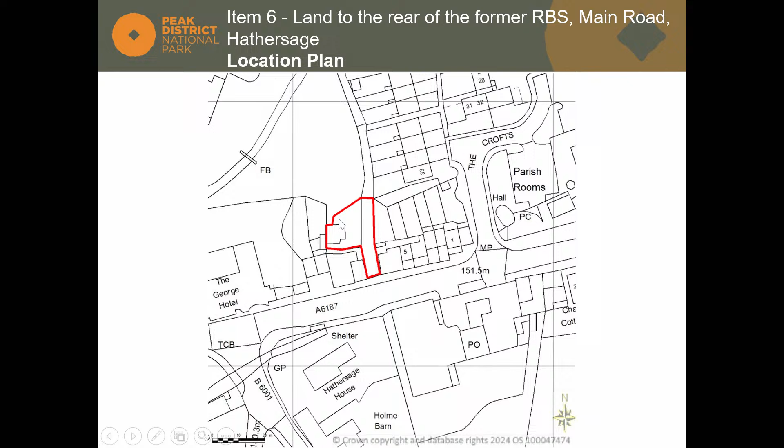So moving on, this is a closer view of the layout. Access from the main street coming from the bottom of the slide here. There's the existing building, which you begin to see is a tin corrugated roof building there. There's 5, or 6 sorry, counting those, parking spaces to the front. The existing building has been used for ad hoc storage and parking for many years. You can see there's a tree to the rear — a small, very poor condition, alder tree — and there are some sycamore trees just immediately north of the building.

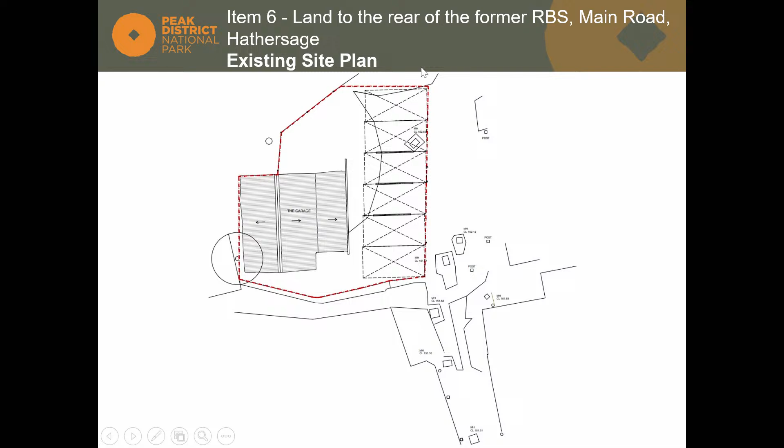So the proposed layout — the proposal is for the reuse or repurposing of the garage to provide, in the applicant's description, a flexible mixed-use business-stroke-dwelling. He stressed to us, and we heard on the site visit yesterday, that it's not for a replacement building.

He seeks to retain the internal frame of the building, and we had a good look at that on site, along with the boarding to that framing, and encapsulate that within new fabric. However, the fact remains, in the officer's view, that there is a considerable amount of alteration, and we'll see that in the plans, which involves one new extension to the south.

So that's a new extension on the slide here to the south of the building. And the existing extension, you can just see dotted to the front, or the projecting lean-to, is replaced in its entirety and extended southwards, whereas the existing main body of the building has its walls clad internally and externally to insulate the building. There's a new raised floor and a new roof with insulation on top of the existing framework. So the building on the plans raises up by about 300 millimetres, and it's reclad with a similar dark black corrugated sheeting along with new fenestration.

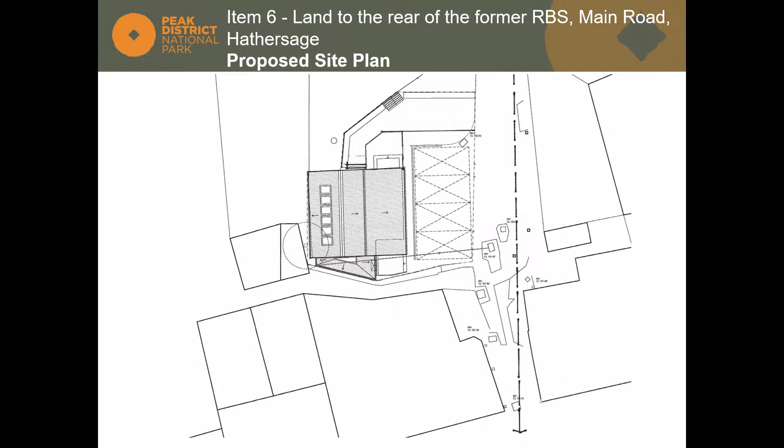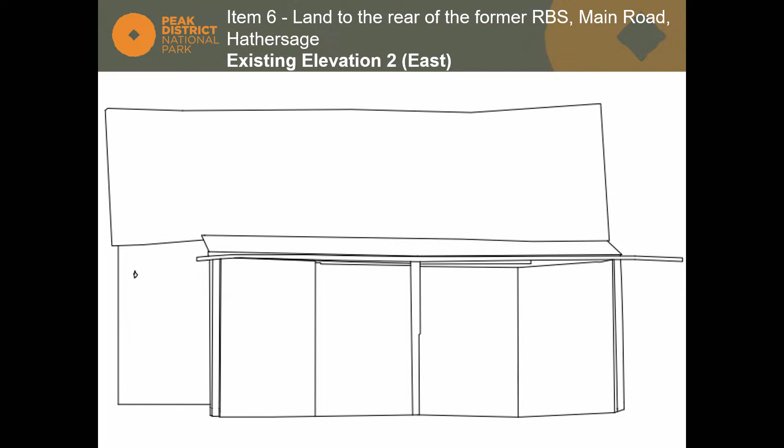So, just going through the detailed plans. That's the existing front elevation and as proposed. So you see, you just make out the dotted line of the existing building there. So you can see the roof is raised slightly. This is the new extension to the left, which has a hipped roof form. There is a timber enclosure for an air source heat pump here, and this is the replacement extension, which is widened to the full width of the building.

And these are glazed, full glazed fixed panels behind what would be timber louvers. And on the right hand side there's a small area you'll see in the plan with access to doors on both sides.

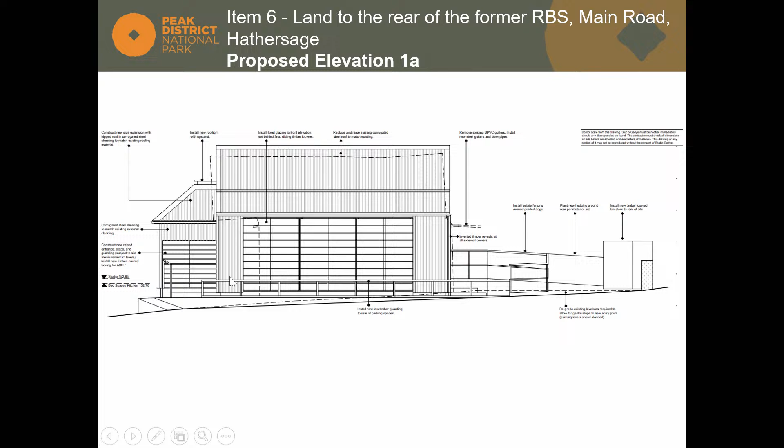It's just a closer view of the same. So that's the side elevation facing the footpath to the Cintra's tea room, and as proposed. So you see the hipped extension there, and the air source heat pump enclosure in the middle, and new glazed doors within this lean-to, which is raised up to provide more height. You can see again the outline of the existing building.

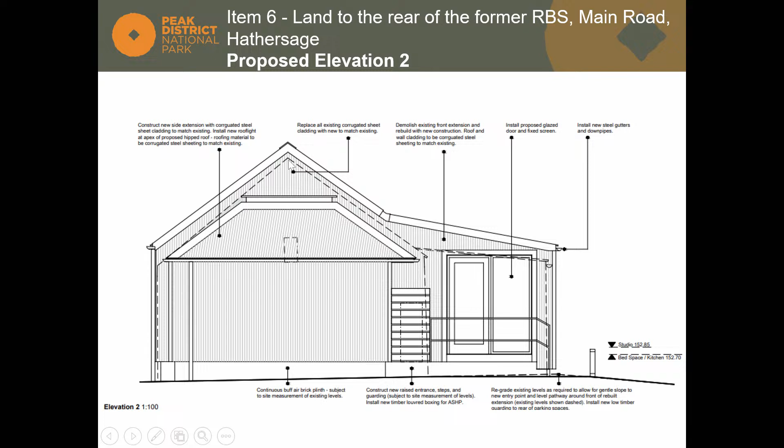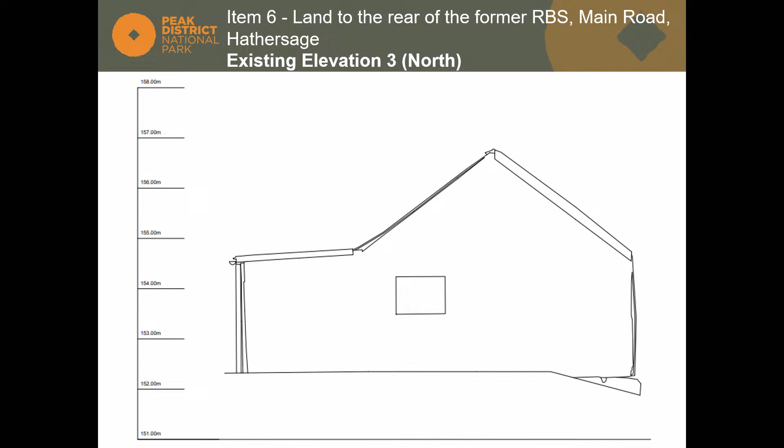And the rear view, and as proposed with roof lights lighting the building. And the other end, looking back towards the main street as existing, and as proposed with the new fenestration and lean-to.

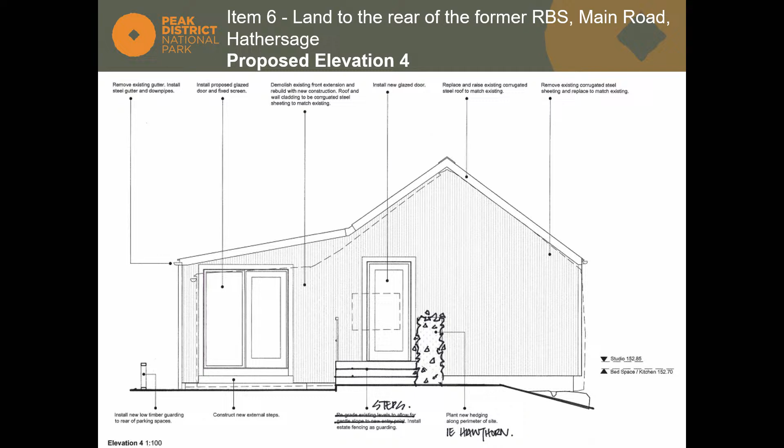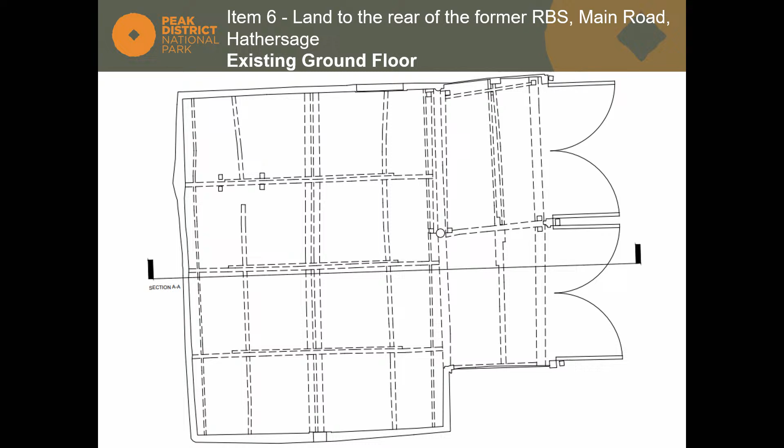So it can be seen in the photographs and these slides that from the officer's view, the building doesn't contribute anything to the character of the village. It's not a valued vernacular or a listed building, and as I said, we conclude it detracts from that. We also don't consider it to be a non-designated heritage asset, a view which is also supported by our conservation officers. There are also concerns about the large glazed panels we've seen to the front, which don't reflect the Peak District building tradition or the character of the existing building, and neither does the form of the hip-roofed extension.

In terms of internal layout, the proposal is to be absolutely clear. It's for essentially a market dwelling with shared space for business use. The layout, the frontal area here is a bed space and a kitchen with left of this line being a studio, and the hip roof extension housing a small bathroom and shower room, and the parking to the front.

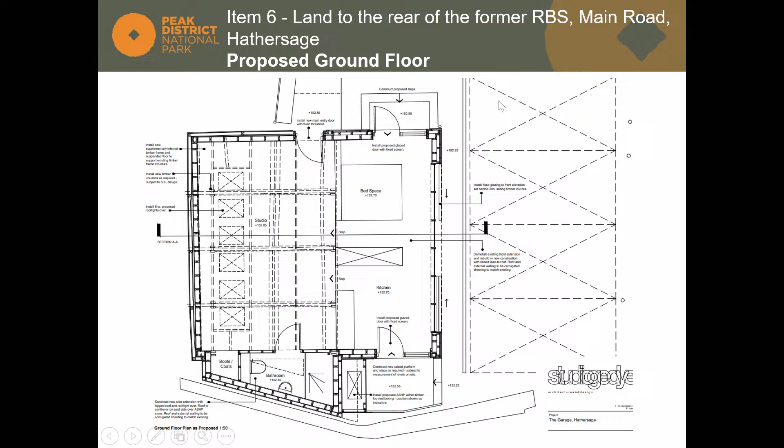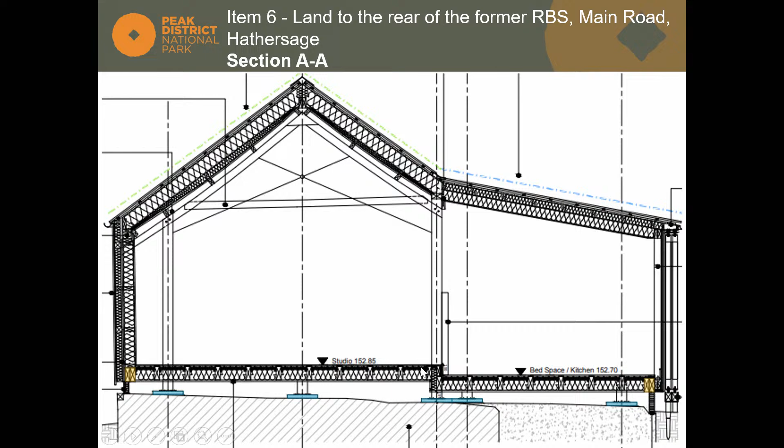And this shows a cross section. So as I said before, the existing framework, the agent explained, is being retained and reinforced as necessary. There'll be new columns within there to support that, and the framing and the cladding, timber cladding we saw, will be retained and encapsulated within insulated walls either side, and new external tin sheeting to the external leaf. The existing ground floor, which is concrete at the moment, will be retained, and a new raised timber floor suspended above on screws set on plates and insulated, hence the need to push up the roof to provide the necessary headroom. That just shows that in a little bit more detail.

So, in summary, there are no highway concerns or concerns about the impact on the trees. And we recognise and indeed applaud the applicant's desire to create a more sustainable building with low levels of embodied carbon and reuse as much of the material as possible, as well as the introduction of the air source heat pump. However, all of those positive measures don't overcome the fact that the proposal seeks to substantially alter a building which doesn't contribute positively to the area. We consider the resulting form, materials and fenestration in particular would exacerbate the untraditional character of the existing building and perpetuate the harm that it currently causes, and indeed enhance that.

It doesn't conserve or involve the conversion of a traditional valued vernacular building, or conserve or enhance the settlement. So it's therefore not compliant with our housing policy HC1. And although it would also create some business space, which in principle is acceptable, it doesn't pick up the opportunity to bring about necessary enhancement that policy allows. Furthermore, the resulting harm to the conservation area wouldn't be outweighed by any public benefits, and consequently we don't believe it reaches the high bar necessary to achieve significant enhancement required within policy GSP2. So for all those reasons, Chair, we recommend refusal.

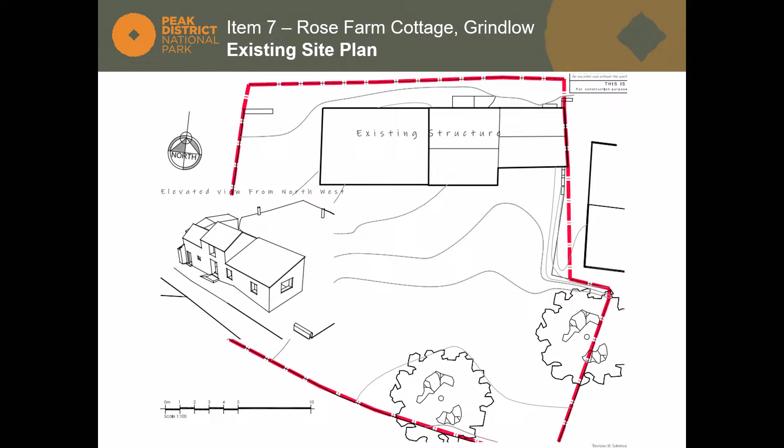So that's the existing layout of the building at the top there. There's sort of three main sections.

The structural report, in terms of losing the building, somewhat sits on the fence. First of all, it says that the building could be converted, but then went on to raise a whole series of issues and problems which normally occur in conversions. But nevertheless, it did say it could be converted.

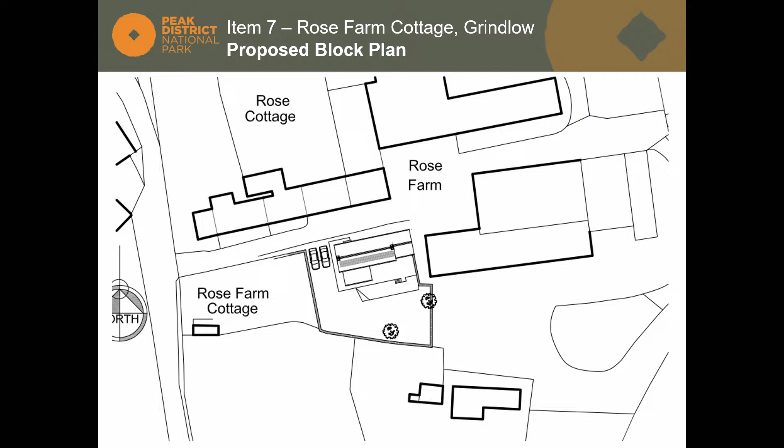But the clear preference of the applicant is to clear away that building and construct a modern dwelling in its place, which they believe would enhance.

So leading on, just a little bit more detail of the layout. It would front that shared driveway, small terraced area to the rear, slightly raised garden area and parking to the side, and this on the roof here is solar panels which would contribute to the sustainability of the proposed new dwelling.

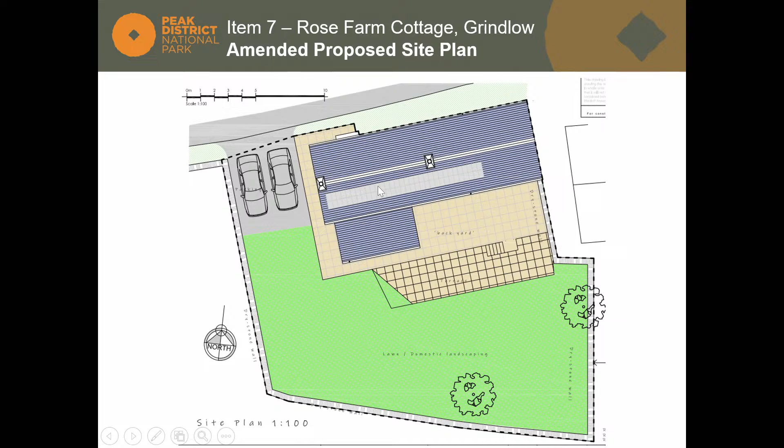This is the footprint of the existing building, and as proposed you can just see the outline. So the new dwelling would sit on the footprint of the existing building and would have that rear projection into the rear yard area. Fairly conventional layout.

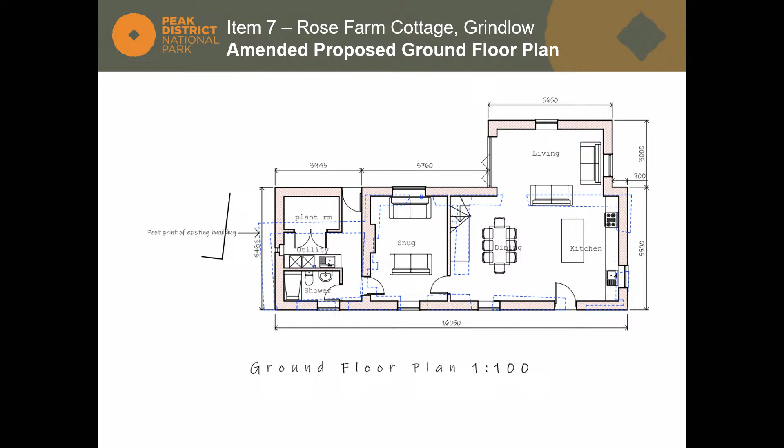The key thing to note here is it is a very long frontage, you'll see in the elevation. Upstairs there's less accommodation as existing, and as proposed you've got the three bedrooms.

The materials would be natural limestone walling, gritstone detailing to the quoins and the surrounds to the windows, under a blue slate roof.

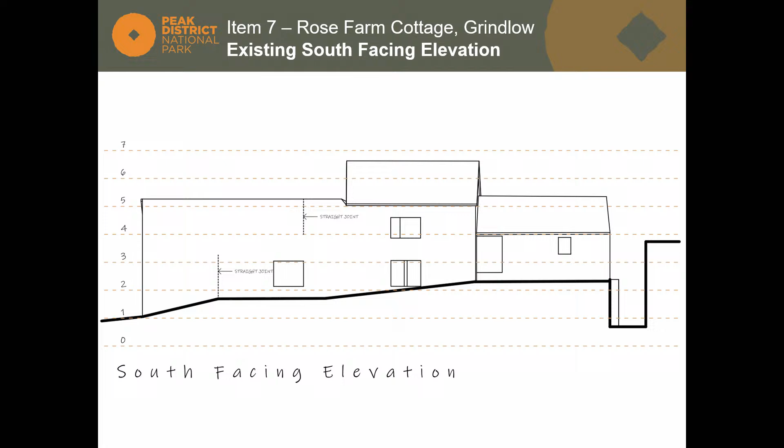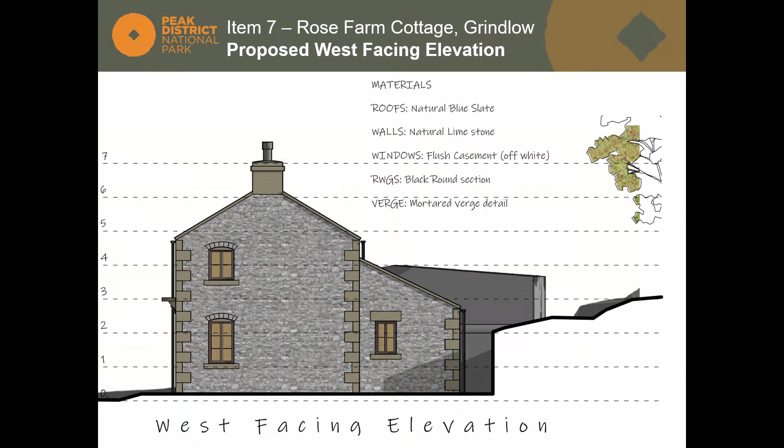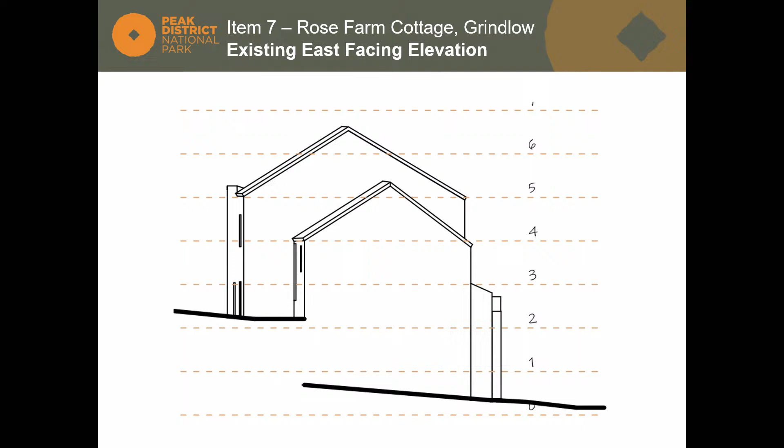And the gable elevation as existing. This is looking up the drive from the main road, as initially proposed, which is the same as the amended plan - there's no change to that as far as I can see. Again, traditional detailing, width of gable, and then the other elevation.

So in summary, effectively this application treats the application site as a development plot. It seeks to completely clear away the heritage asset and construct what is in effect a large 3-bedroom market house. Our policy HC1, housing policy, doesn't allow for new market dwellings except in very exceptional circumstances where it's required to achieve conservation or enhancement of a valued vernacular or listed building, or to achieve enhancement in settlements, a DS1 settlement. This isn't such a settlement, it's a small hamlet. And as the scheme results in the total loss of the heritage asset, it doesn't bring any conservation or enhancement.

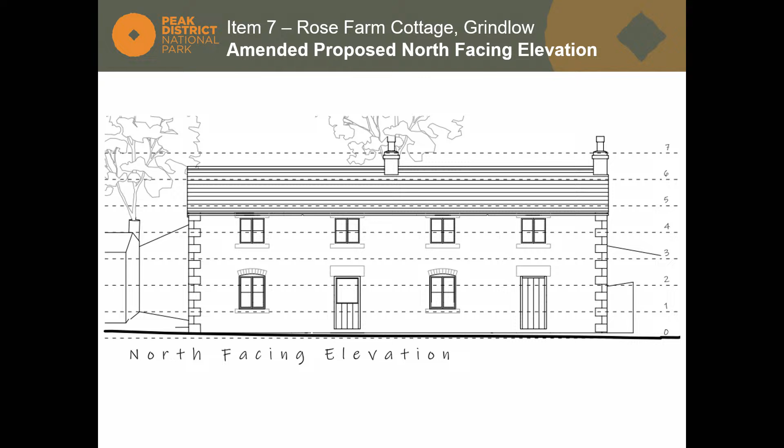Yes, you can argue it tidies up the site and presents a neat and tidy dwelling, but that's a market dwelling. It doesn't contribute to any of our other purposes, and the harm from the loss of the heritage asset is not outweighed by that tidying up, in our view. Therefore, as there is no significant overall benefit to the national park, it wouldn't accord with our policy GSP2 or our housing policies. Obviously, there's no concerns about archaeological, ecological or highway matters, but on the key housing and conservation issues, Chairman, the officer recommendation is one of refusal in this case.

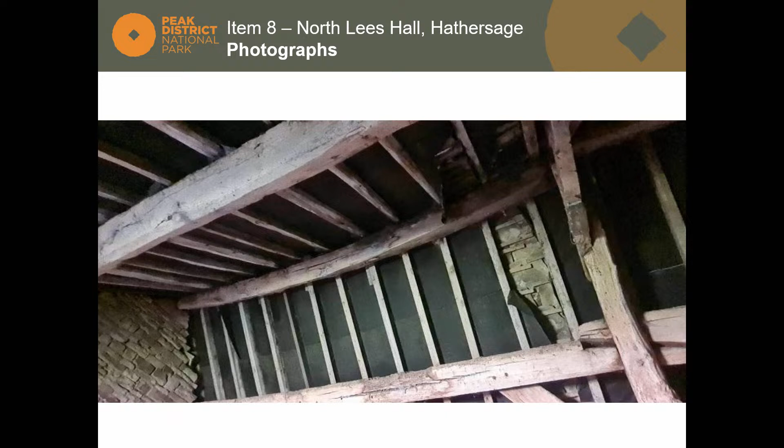That's another view of the failing slate, and you just see the top of the cruck frames, which are one of the most important features of this very impressive roof structure within this building, described by our conservation officers as probably one of the most important agricultural buildings in the national park because of the age of its cruck barn frame.

You can see here how the current unauthorised bitumen felt obscures all views of the underside of the stone slates, which would normally be one of the defining characteristics of the internal view of an agricultural building of this age, and contribute strongly to its significance.

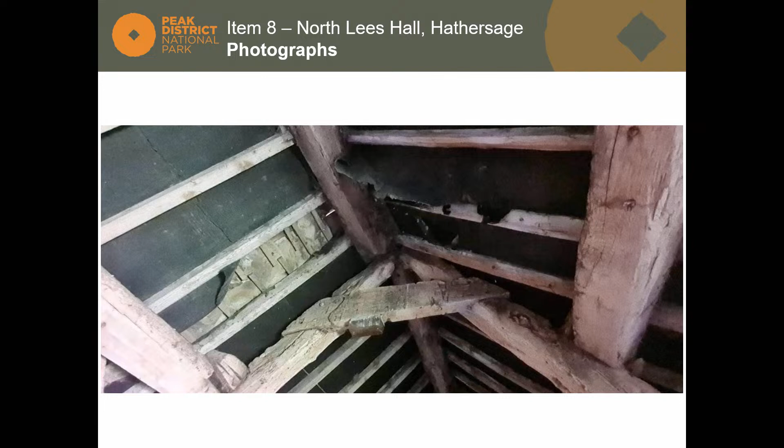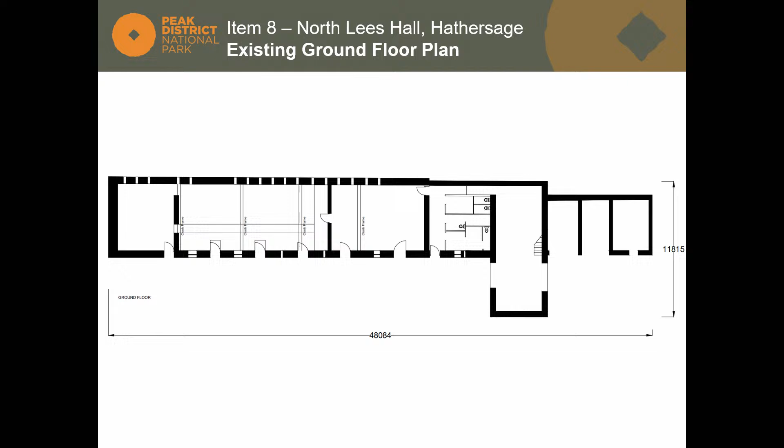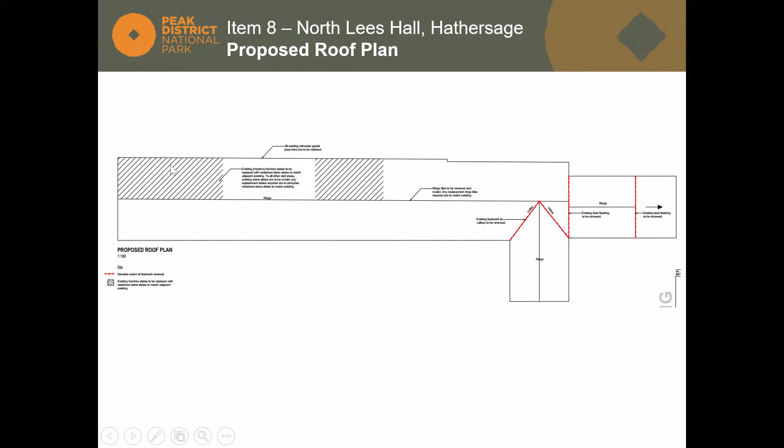The upper floor, again, there's no change to the floor layout. This just shows the position of those 4 cruck frames and the proposed roof plan, which identifies in red the areas where the lead flashing and lead valleys would be replaced, and the areas of concrete Hardrow which would be replaced as well.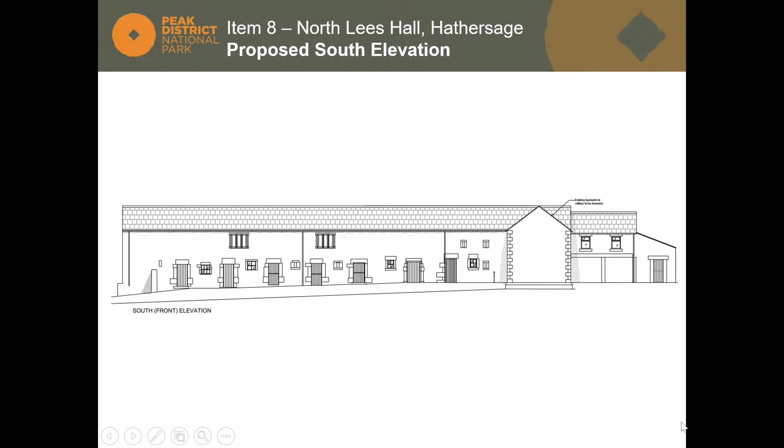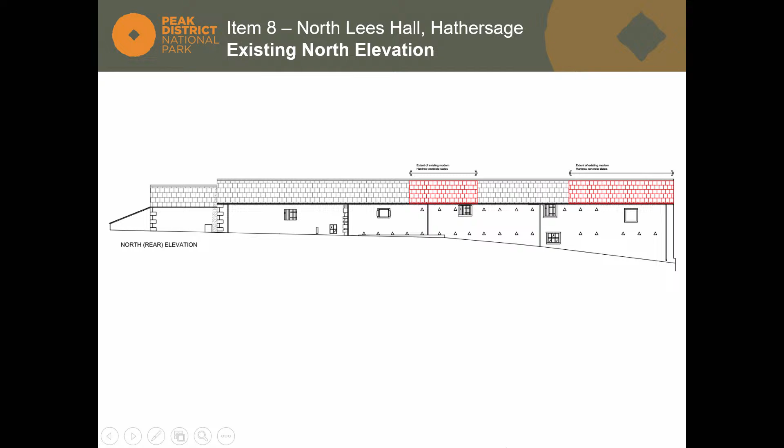Elevation wise, this is the south facing elevation. There's no real change there other than obviously the flashing, which isn't really discernible in this photograph, and the rainwater repairs. But on the rear, in red, those concrete tiles would be replaced by matching stone slates, providing a significant enhancement to the character and appearance of the building.

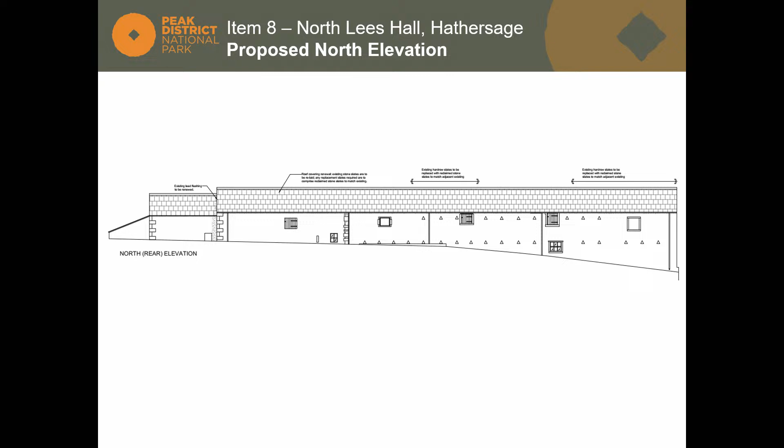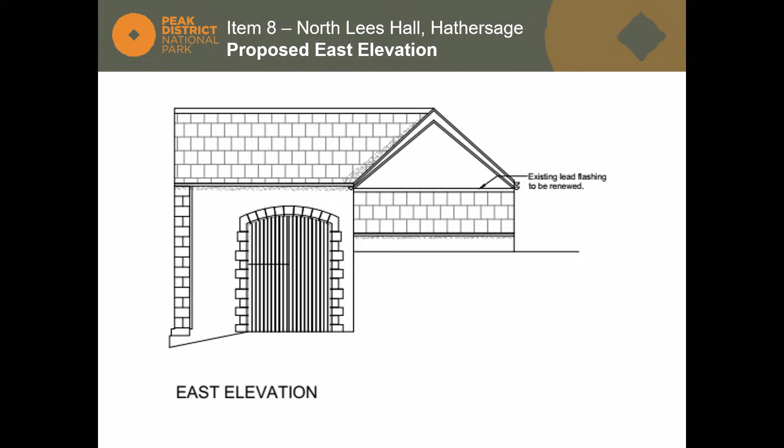As proposed, obviously all one material, with the structural repairs to the timber inside, a straight ridge line as well. Again, the 2 gable elevations show no real change discernible, other than the improved flashing and verge detail.

Since that objection was raised, the applicant has had further discussions and provided further information to our ecologist, who is now satisfied that the works could go ahead, subject to conditions controlling when any works would take place. Essentially, those would need to take place outside of those sensitive periods where the bats are least vulnerable - during the month of April, or mid-September to the end of October - subject to conditions and the appropriate mitigation set out in the bat report for both bats, breeding birds and barn owl. There are no further ecological objections to that side of things.

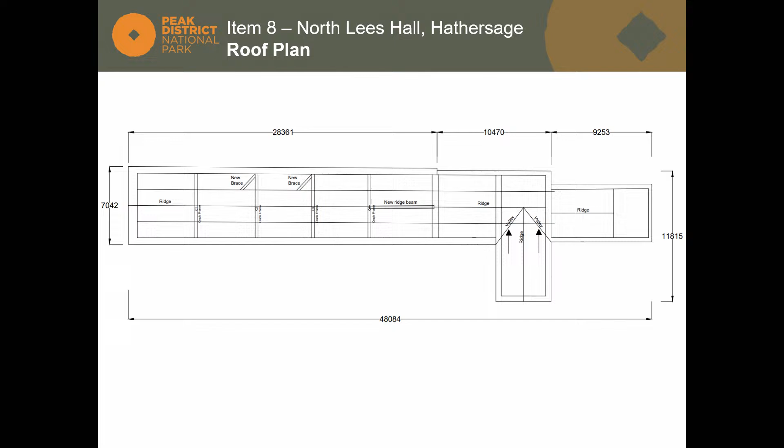Now, just turning in more detail to the repair and renovation works to the structure. Obviously, repairing the building, making it weathertight, replacing the concrete tiles, and repairing the timber roof structure are all welcome works. They would enhance the significance of the building and are, of course, necessary and essential repairs at the moment, because water is getting in and causing damage.

However, in addition to those welcome repair works, the applicant also wishes to take the opportunity to replace the existing bitumen roof membrane with a modern polymer breathable membrane whilst doing the re-roofing works.

Nevertheless, that, from our point of view, does require - I've got a section here showing where that sits. So this is the existing roof with the cruck frame, the rafters, and the existing bitumen felt is shown in red here, which is then battened on top, and then the slates on top of that.

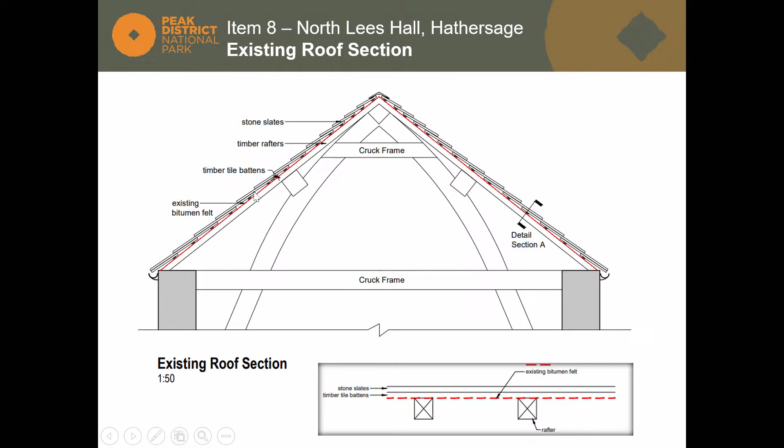The proposed replacement of that by the modern membrane would be in the same location. It would sit on top of the rafters. There would be battening, and because of the nature of that membrane, it would also require cross battening, which would have a minor but nevertheless harmful impact of raising the roof at the same time.

The more important issue, though, is the introduction of the membrane itself, which is a modern intervention into a building. It's not a traditional method of repair or renovation of buildings of this high significance. The harmful impact of that introduction is set out in the report, but essentially arises from the following aspects.

First, it's a modern and non-traditional method of repairing such buildings and making them weathertight, on what is effectively a 17th century cruck frame barn, instead of a traditional method of achieving the same aim through a technique called torching - when, in bedding the tiles on, you use a lime mortar to give weather protection to stop wind-driven rain getting into the building, whilst at the same time providing traditional breathability to the building itself. Secondly, you've also got the harmful impact of covering up the underside of the slates.

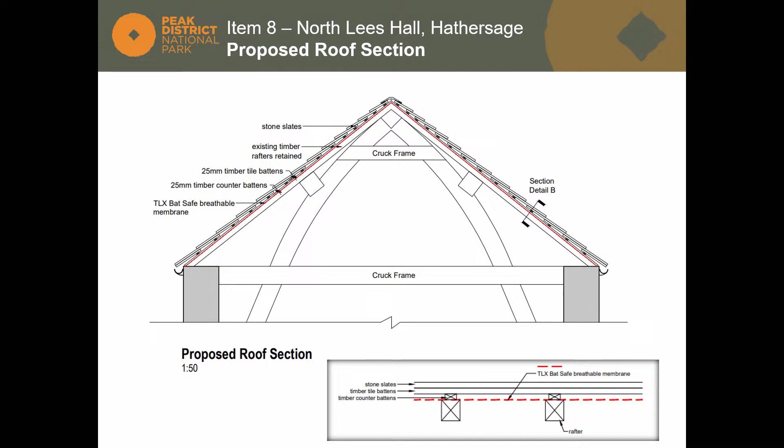Yes, two - Beth Fenner. Hello. No, it's fine, I'll go first, Chair, if you don't mind. That's okay, sorry. Okay, Hannah, thank you. Thank you. We've never actually met, have we? Only in committees, I think. But no, thank you, and good morning everybody.

I'm speaking as Head of Service for the Assets team at the Authority. There is a vision for the North Lees estate that will be supported by a new estate management plan and an HLF bid. Consultation with all key stakeholders regarding the estate plan and the HLF will be undertaken, and working in partnership will be a priority when addressing the needs of the estate, the National Park and its stakeholders. The existing estate management plan expires next year.

The vision is to create a range of accommodation types across the estate that provides an inclusive, wheelchair accessible accommodation model across a broad affordability bracket. This would maximise market appeal and would expand the existing offering of the campsite and the holiday cottage accommodation to also include the hall, the farmhouse and the Cruck Barn.

The development of this vision would be worked up in the HLF bid in 2025, with an aspiration of securing funding to deliver these projects. The North Lees vision aims to deliver the National Park Management Plan purposes of supporting communities, climate change and access to nature, whilst maintaining and showcasing our heritage assets for all to enjoy.

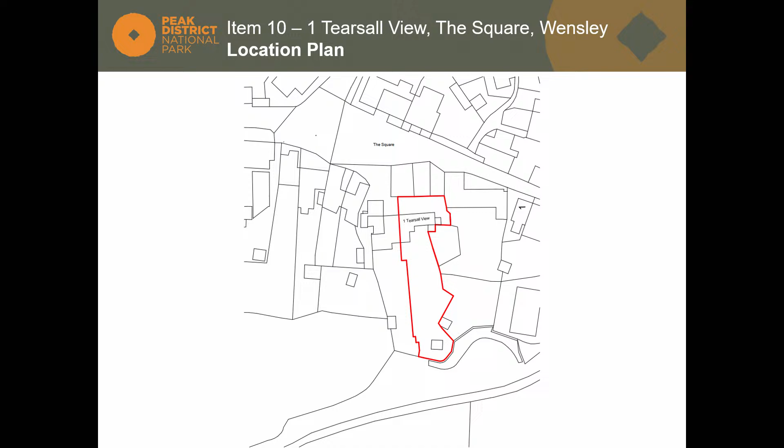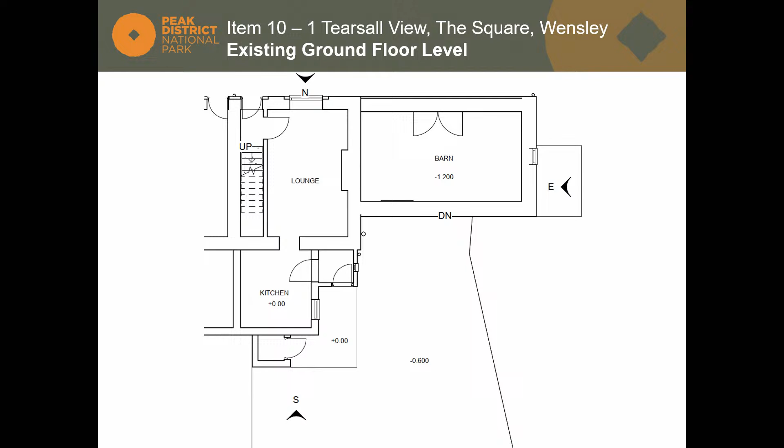Now I'll go on to show you the existing and proposed plans. This is the existing floor plan. You might be able to see on there the barn to the right side, where it says barn, and you can see it's minus 1.2 metres, that's the floor level below the main house.

And this is what's proposed. The floor level of the barn will be increased to be at the same level as the house, and you would then have the wraparound extension where you can see the living and utility area. The barn conversion element would provide a bedroom and accessible bathroom, with the floor level raised to allow level access to the main house.

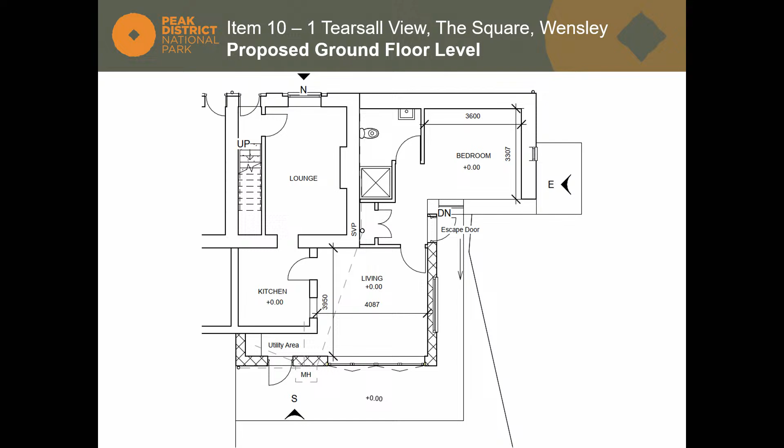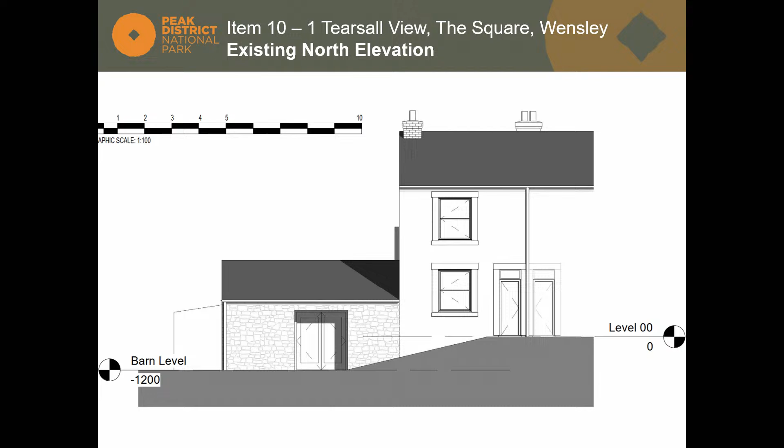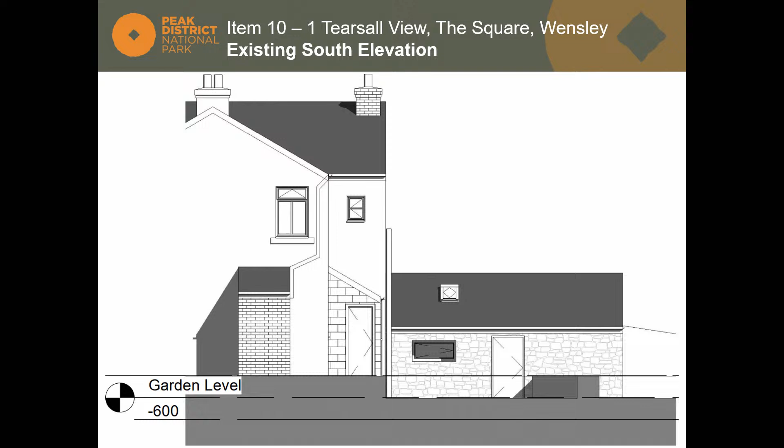Now this is the rear elevation, as is, and the proposed. Here you can see the wraparound flat roof vertical cladding added to the rear extension. On the barn, you can see the 1 roof light, and the increase in height of the barn is about 0.15 metres, 150 mil.

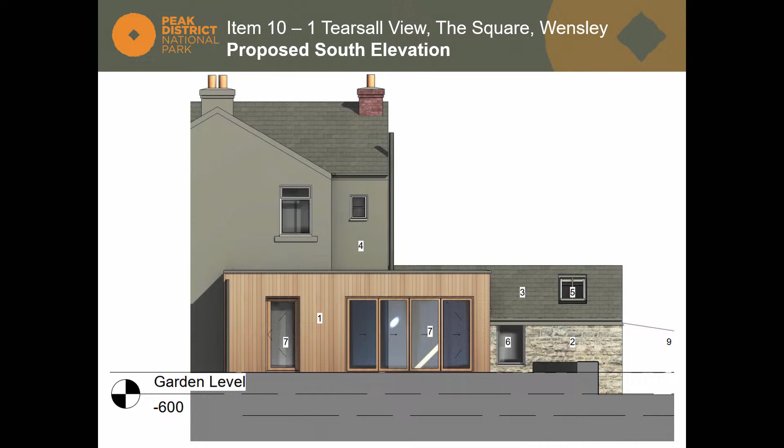Last few plans to share - this is the side elevation, and then this is the proposed side elevation. So again, the ridge of the barn is slightly increased, and then you've got the large flat roofed extension going from the barn, wrapping around to the main dwelling.

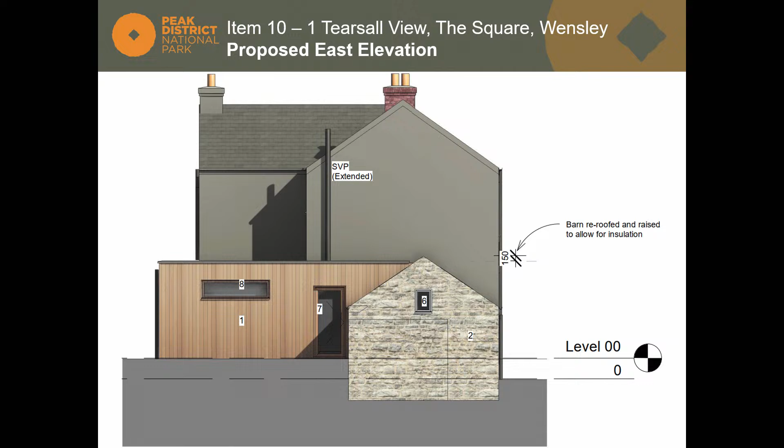The members have had the report to read over, but I'll provide a very brief summary of the recommendation. It is noted that applicants have stated the development is designed to ensure the main dwelling and barn can provide accessible living accommodation, with a need for level access to living space, a bedroom and bathroom facilities. Though the personal circumstances of the applicants are acknowledged, it is concluded that the benefits to the applicants will be temporary, whereas if approved, the planning harm identified in the officer's report would remain.

Overall, there are two reasons for the recommendation of refusal. One, as stated at the beginning, is the absence of ecological information relating to potential impacts on protected species. The other reason, as made clear in the officer's report, is that the extension, due to its scale, massing and exterior materials, would relate poorly to the dwelling house and barn.

The extension will be a substantial structure that wraps around the rear and side of the dwelling house, and particularly with a flat roof abutting the roof of the barn at a high level, it would result in a contrived and awkward interrelationship with the traditional form and character of the existing property. The harm to the non-designated heritage assets and conservation area is considered unacceptable, and there will be no wider public benefits, though acknowledged there will be private benefits, but not enough to outweigh that harm. For those reasons the application is recommended for refusal. Thank you.

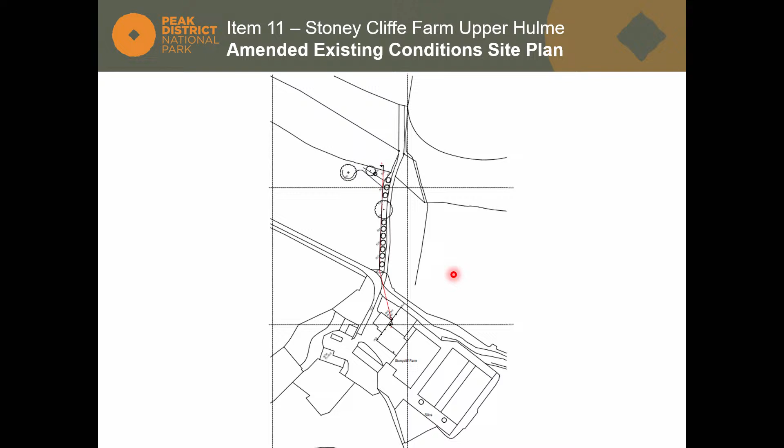And that's showing the existing site plan, and there is the proposed. So this area here is the cutout into the landscape. This is showing the land reprofiled behind the cylindrical slurry store, and the red line running across the site is the pipe that would feed it.

The store is required to reduce runoff from both the yard and the existing agricultural building, and the intention is to be a gravity-fed system so that the runoff comes down the pipe into the new slurry store here.

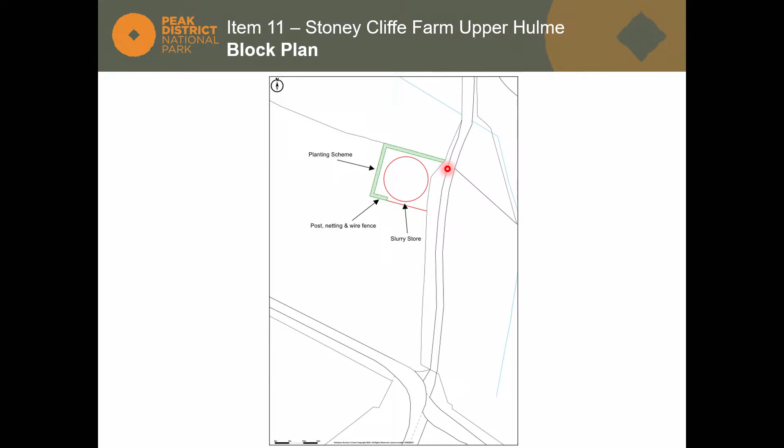And this shows the application site. So, if I go back again, this boundary that you can see here is this boundary here. And you can see the land drops off quite steeply here, so it's proposed to excavate this corner of the field, level it, and put the slurry store in that position.

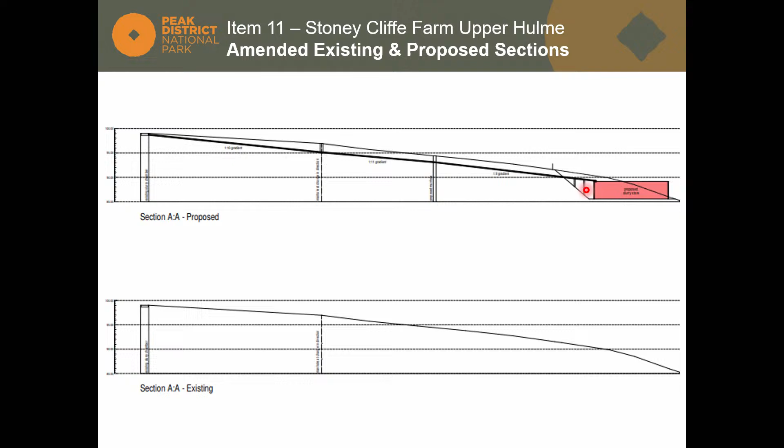And this shows a section through. So there's the existing land, dropping down to roughly where that line of trees in the field boundary is at the bottom edge. It would be cut through, and you can see it's proposed to be graded back, and the store would sit into the cutout area. The dark black line you can see is the pipe, which goes below ground until it projects out of the cutaway in the embankment and goes into the top of the slurry store. And these are just props for the pipe.

So I'll just go back to a wider scale plan. The application's acknowledged and accepted in principle. It's obviously intended to reduce groundwater pollution, which is both a regulatory requirement and a benefit to the national park. Our concerns in this case relate solely to the siting of the store, the distance and isolation from the main farm group being the main issue.

In the wider landscape, the buildings are already seen, and our concern is that the slurry store in this location will be seen as isolated and separate from that, in views from the footpaths and the roads to the north and the northwest. Whilst there is a degree of screening, particularly in the winter months, that will only be partial, and we feel that the building would be better sited, better related to the main group.

Those conversations have been had with the applicant to see if they would entertain other sites closer to the building group. However, they've said because it's a gravity-fed system, and because they feel that the visual impacts of the store are better here than they would be with the farm group as well, they want the application to be determined as submitted based on this location. But because of the landscape impacts that we consider are associated with that, the application is recommended for refusal, Chair.

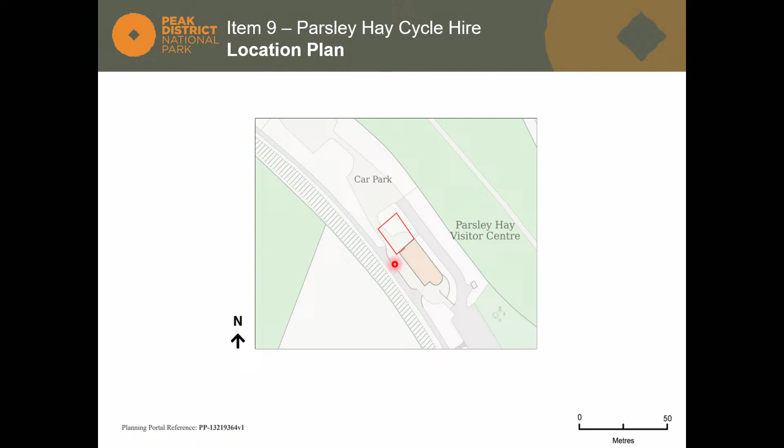And the building currently on the site is on the site of a former railway goods yard and was constructed for this visitor centre purpose. You can see this site here on the screen. So there's the existing building here, and the application site itself is bounded by the red line there.

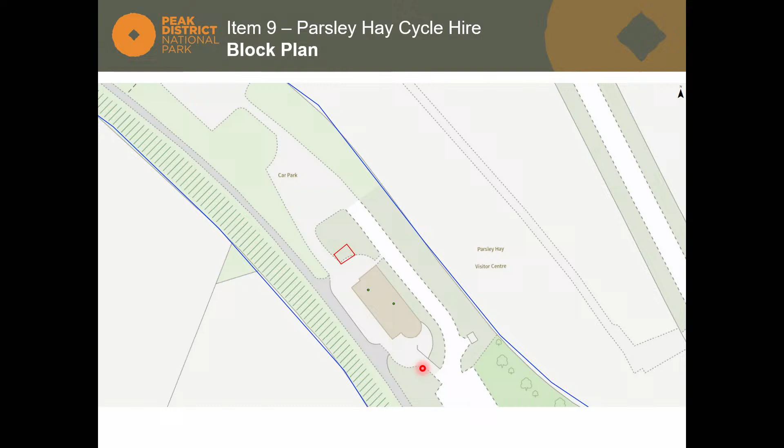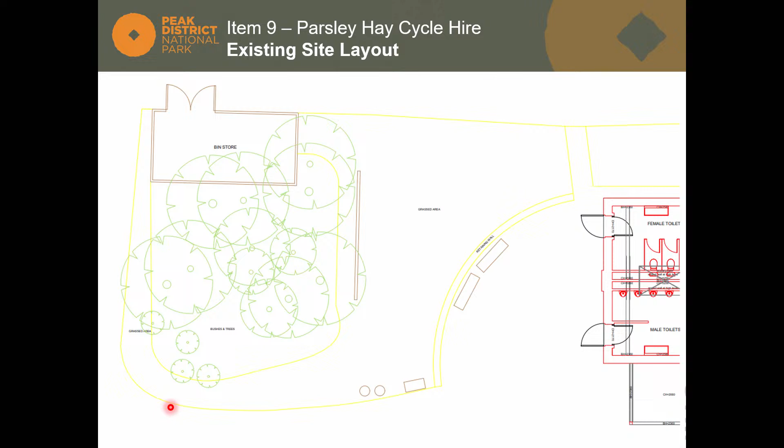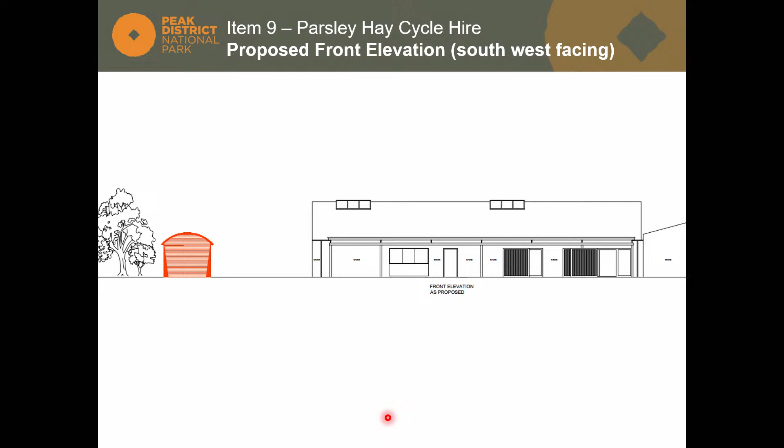Here's an existing site plan, so again you can see the existing building to the right, and the proposed unit would be sited here on a small area of the grass. And that's showing what it would be like in context with the building it's serving. The design, as you'll see through the other elevation plans, is—sorry, to show you a floor plan there.

So for those who aren't familiar, the changing places toilets are larger than standard accessible toilets, and they're generally designed for dependent use so that users can be accompanied by a carer if necessary. And this shows the building in elevation.

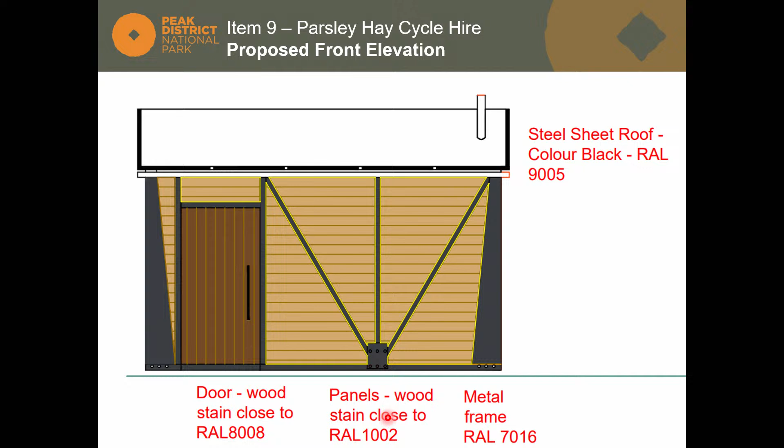Our officers, as you've seen in the report, have concluded overall the development's acceptable. That's subject to some conditions. The land on which it's proposed to be sited, obviously there'd need to be below ground works for drainage, and that has the potential to impact on the tree roots of adjacent trees. Whilst none of those trees in and of themselves are of high significance, they have a landscape value, and so we'd need to make sure through a condition that was considered in the works, that those impacts on tree roots are avoided as far as possible, and where they can't be avoided, that mitigation's put in place.

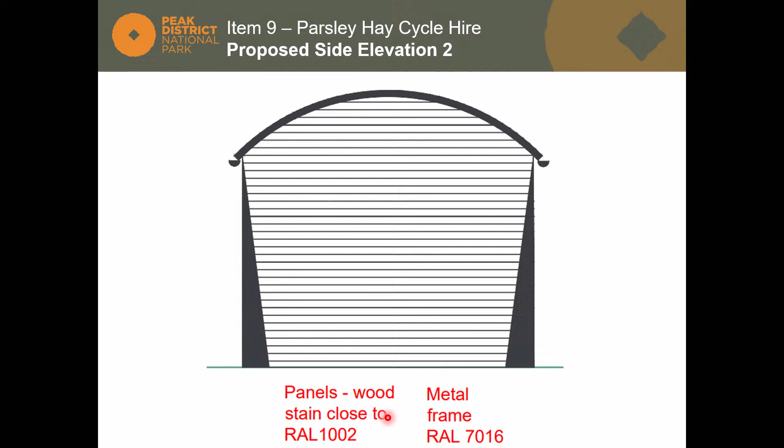Equally, it's a form of railway sidings as well, so there's potential that there's heritage interest below ground there. So an archaeological condition to secure a scheme of investigation for a monitoring of the works is also recommended by condition. Subject to those, Chair, the application is recommended for approval. Thank you very much. I'm happy to move that.

It's just that the point was made when we were on site visit yesterday, Chair, that the orientation of the unit is at odds with the direction of travel, and whether it could be swiveled through 90 degrees so it ran parallel to the track that used to exist. There was going to be some investigation as to whether that was possible, but there's been no time for those investigations since yesterday. A decision could be made on the basis that we explore that if members feel it's necessary.

In that case, can I withdraw my motion, if you'll permit me, and say that we approve it in principle and authorise the officers to settle the final orientation of the truck. Are you happy with that? Okay, all those in favour? Anyone against? That's it, thank you very much.